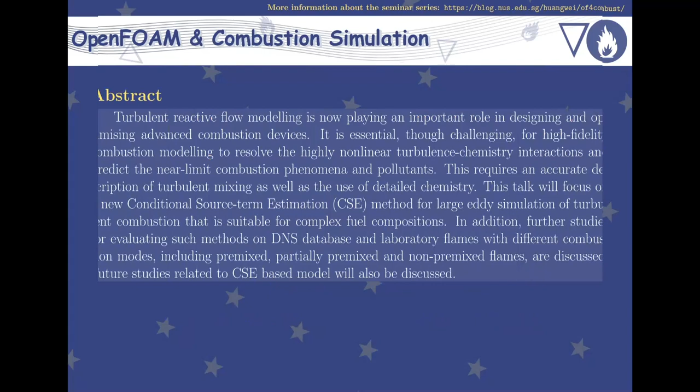So today is my great honor and pleasure to introduce you Dr. Liu Fang. Dr. Fang is an assistant professor at the Schulich School of Engineering, University of Calgary, and visiting academic of the Thermal Propulsion System Research Group, TPSRG, at the University of Oxford. Before his position in Calgary, he was an engineering science lecturer at Oriel and Somerville College and senior research at TPSRG. His research interests include turbulent combustion modeling and high fidelity simulation with detailed chemistry.

He received a Bachelor of Science degree from the University of British Columbia in Mechanical Engineering Thermal Fluids option in 2016, and a PhD in Engineering Science from the University of Oxford. Currently, he holds several projects as the principal investigator, PI, for the study of novel combustion chamber design and numerical study of abnormal combustion. So today he will talk about the conditional source term estimation, CSE model, hypothesis validation, and the model development. So let's see what Professor Fang can give to us.

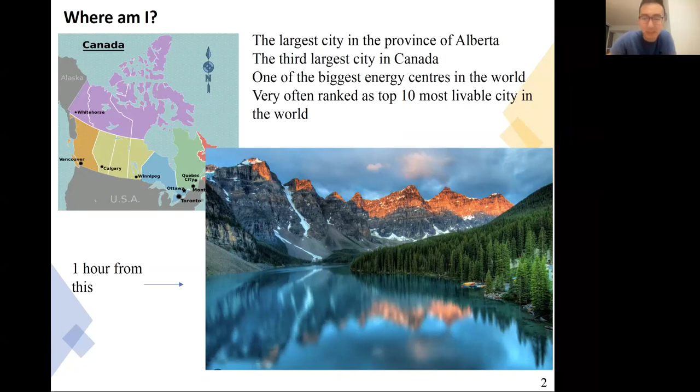Okay, so first of all, where are we? Most of you haven't heard about University of Calgary. We are a university in Canada. So we are located, we will say northwest of Canada, somewhere here, very close to Vancouver, and then probably pretty far away from Toronto, which are the two cities you would know for Canada. So we are the largest city in the province Alberta here, and then the third largest city in Canada. So we are one of the biggest energy centers in the world because there is oil and gas industry here. We are very often ranked as the top 10 most livable city in the world. And then if you haven't heard of this, you probably have seen this picture from your Windows screensaver. And this is us, which is 1 hour from here, which is Banff National Park.

Yeah. So a bit of University of Calgary. So we are a public research university in Canada. We are a U15 member, so one of Canada's top research universities based on the number of Canada research chairs. So we have a very high research budget or total revenue, which is around 1.2 billion Canadian dollars each year. And we have, as I said, very close ties to petroleum and geoscience industry with lots of opportunities in the energy sector because we are very, very close to the oil sand. So we also have a recent opening for an energy transition center, just purely for the University of Calgary. And then we also have an aerospace connection network. So this is about what I'm going to introduce for University of Calgary.

And then now it turns to what are the main research areas I'm currently covering. So one of them is turbulent reactive flow theory and modeling. So this will be a part of the topic here, which includes chemical source term modeling, turbulent chemistry interaction, and then models relevant to conditional moment closure approaches. So we also have a bit of collaborations with the University of Oxford in terms of chemical kinetic studies, because there are combustion bombs there. We do measurements for laminar flame speed. So therefore, we would do a little bit of chemical mechanism validation and then detailed chemistry software development just for the validation of laminar flames. We also have numerical studies of laminar burning velocities.

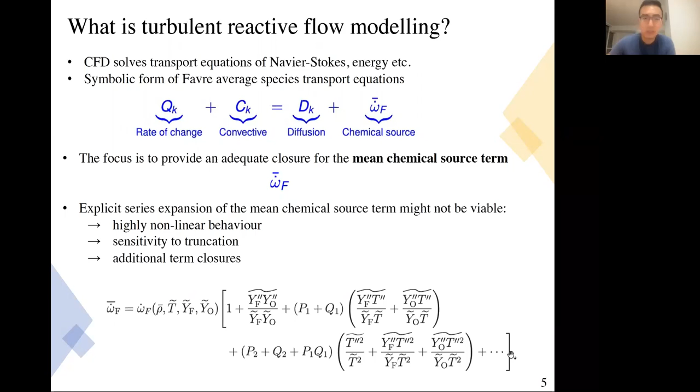So there are different treatments in the literature, but there are difficulties. Why is this very difficult then? It's because in a physical system, let's say I'm in an engine, or an aerospace engine or a gas turbine, what we would have is something burning, right? So if it's burning, we would have chemicals, and in chemicals, we would have chemistry. For a simple methane, we would have different scales for chemical reactions. And this can become exponentially more complicated when the fuel becomes, let's say, higher carbon fuels or a blend of fuels.

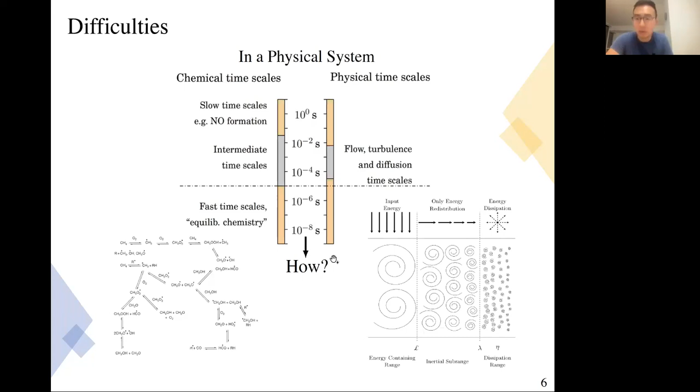And then now we also have the physical side of things, which includes physical timescales, which is the turbulence. So we would have energy containing range, inertial subrange, and dissipation range. But if you are in a system, these do interact with each other, right? And how do we incorporate this, which is what we call turbulence chemistry interaction? And this is one of the very essential parts of turbulent combustion modeling.

So what are the options? I'm not going to do an exhaustive list of the things that we can do for combustion modeling, but here are some quick examples. So a lot of the studies would use well-stirred models. We would assume that mixing is infinitely fast compared to chemical reaction timescales. The advantage of this style of study is that we can incorporate detailed chemistry. We will have a direct integration approach to evaluate the mean reaction rate. Omega can be a function of the mean species or temperature, etc.

But the thing is that here only the first order moment, or the mean of the scalars, is considered as a function, and it might be very tough to include TCI without any modification of the hypothesis. And then we have another school of combustion models, which is flamelet models.

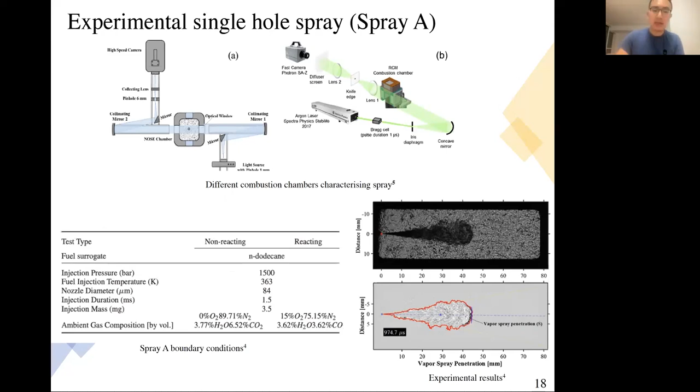So as a validation case, we will use the n-dodecane case because it's well validated and well studied. And then obviously this is Spray A, which includes the non-reacting and reacting n-dodecane, because at the time the project was mainly focusing on diesel engine studies. So what we have is reacting cases with increasing oxygen concentration as well as different gas compositions.

So what we have found is that, first of all, we implemented this in LES, but this can be directly transferred to RANS as well, because this approach does not have limitations in terms of implementation with RANS and LES. It was found that it's capable of capturing two stages of combustion, which is the characteristic of Spray A. And then we also compare with the schlieren image on the instantaneous temperature field from CSE FGM, which is on the right side, and the simulation on the lower part compared to experiments.

And then perhaps more encouragingly, what we found is that we can actually use this CSE FGM type of model to capture the scalar dissipation rate and its evolution with the flame extinction and then reignition. Although we believe that there might be more improvement for this model, because we use mixture fraction only to capture ignition, we can still find it, which is a very encouraging point for us to continue working on and improving this study. And then here are some results that have been published before for the CSE FGM type of approach.

So what's next then? What do we have next? So we have premixed combustion using CSE, which was covered by Professor Mahdi Salehi, and then non-premixed, which I've just shown. And now we have a more realistic representation of the flame, which would be partially premixed. This is undoubtedly more realistic compared to the previous perfect assumption for the flame configuration. So what can we do to make this happen for partially premixed flames?

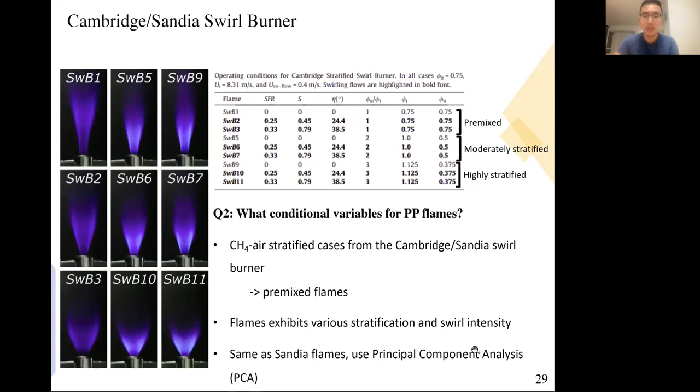So what we have here is for the swirl burner, we have premixed flames, but because of the stratification we have, it can be considered as partially premixed at some point, okay? So now we have flames that exhibit various stratification and swirl intensity. Same as the Sandia flames, but now we can use principal component analysis, because one of the things we want to study is what conditional variables to use. There are many techniques instead of choosing it directly, because we have the data, right?

So we have the data, which is a methane flame from the Cambridge Sandia swirl burner. And then we have 5 million point-based measurements of temperature and major species. Because we have major species and temperature, and it's 5 million points, you can literally treat this as single point measurements or a large eddy simulation of experiments.

So we can use principal component analysis to parameterize the given data using a reduced number of variables to see which variable is most significant in representing this flame. And therefore, we can study whether the extracted progress variable is a good option for doing this simplification.

So what we did is we chose different scaling methods based on suggestions from colleagues. And then we defined 4 different progress variables based on the PCA analysis, which I'm not including here. You can find details in the paper. We use progress variable 1, and a little bit of a surprise to us is that temperature is actually a good progress variable for representing this. Maybe not too much of a surprise because it's stratified, but one of them is temperature.

The next one is CO2, which we usually use anyway, and then CO2 and CO, and a combination of H2, H2O, and CO. This is data directly extracted from PCA, and we also correlated it to things we found in the literature as good representatives of the progress variable. So now we did progress variable combinations for this study. First of all, there's one combination with the progress variable as a single condition, because it's a premixed flame, so a lot of studies use progress variable as single conditioning.

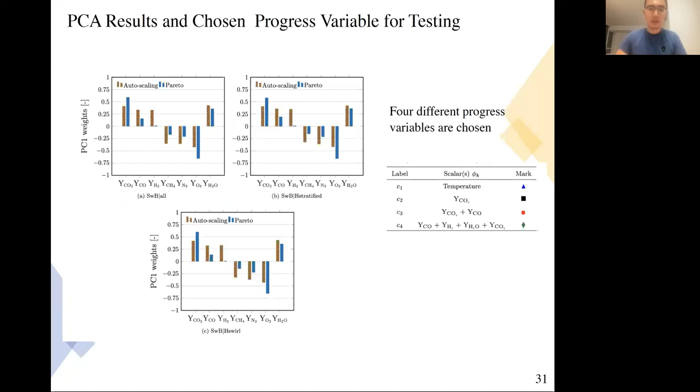And then this is what we have today, very short, brief studies on why we need CSE, why this is a good idea. We have more studies and more hypotheses to come, as I've shown here. We only cover question 1 and question 2, but a very big chunk of the study is what the best probability density function is. At the moment, usually what we have is a beta-beta function for progress variable and mixture fraction.

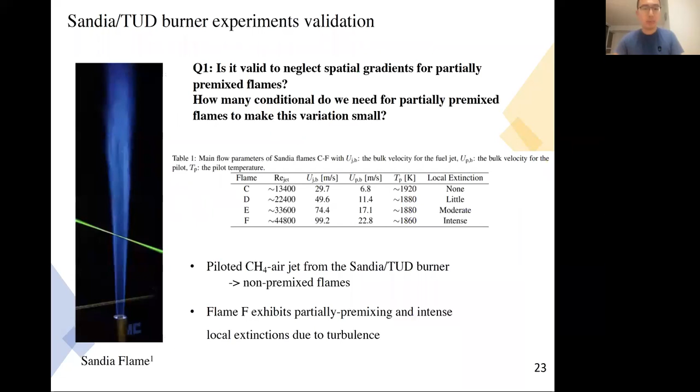But do we need more? Try something else, and see what an a priori study would show. And because we have the Cambridge swirl burner, can we directly reconstruct it from the partially premixed flame measurements and see what the best joint probability density function is? So we still have question 3 to be covered before we do a lot more implementation. But that's everything I had for today.

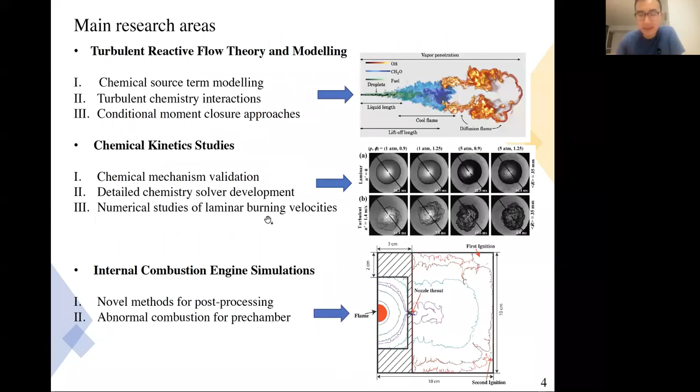Okay. Do you want me to go through this question first? Okay. I have very bad memory, apologies first. So first, what are the criteria for grouping? What we have is just physical dimension. The main reason for grouping this way is because we did the a priori studies later on, and we verified it's actually okay.

Yeah. Okay, I understand. My second question is, for CSE estimation, sometimes you will get unphysical values, for example, negative temperature and mass fraction larger than unity. So have you done any correction on the CSE estimated values? How did you treat this?

Yes, so one of the things you have to remember is that there is a major flaw in this method, because we use mathematics. It's actually not a conserved method. So that is a very big flaw, which we admit. But the advantage is way ahead of the flaw. So what is a good way of regularizing it? It really depends on your technique of regularization, because my approach is based on FGM.

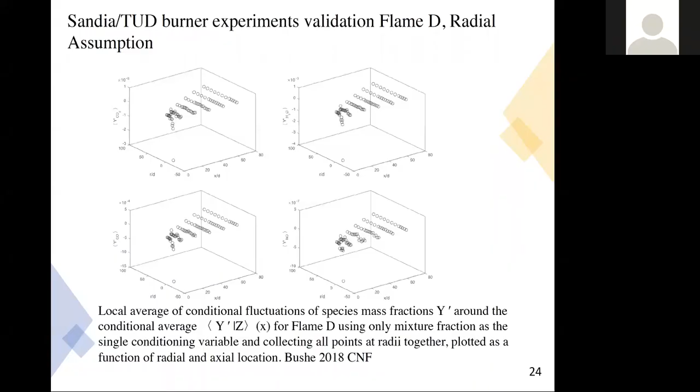Yes, of course. You mentioned that initially you introduced the CSE model with a single conditioning variable, right? And then you moved to double. So how about the computational cost when you move from a single variable to a second one? It would increase. First of all, on the transport equations themselves, you would have at least 2 more transport equations, for the progress variable and the double prime of the progress variable, which is the variance of the progress variable.

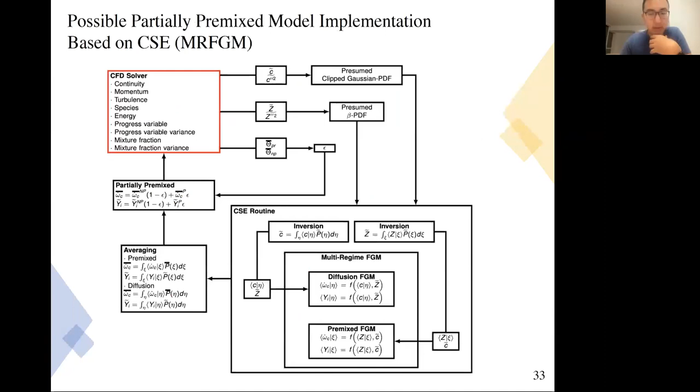And then you would also increase the size of your tabulation, because now you have a slightly bigger table which includes different parameters. And you would also have a joint probability density function, which is slightly more complicated as well. But I think it is worth it, because we are very confident this is one of the models that can produce very good results for partially premixed flames. So the compensation for this is good.

And also, remember, this is a model that can cover studies that are unresolved. So you don't have to go to a very fine grid to do this, because it's based on the physics thinking that the progress variable follows either a beta function or a clipped Gaussian, and mixture fraction follows a beta function PDF, which is proven by experiments as well as DNS. So therefore, the computational cost might even get lower.

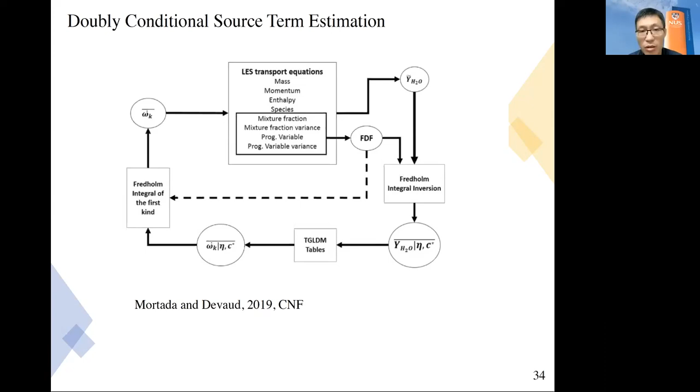Okay, yeah. Because I remember the people from the University of Cambridge also developed a double conditioning CMC. Actually, the computational cost probably will increase very quickly. So I'm not sure if you compared double conditioning in CSE and double conditioning in CMC, because here I guess all the comments are based on a single conditioning variable, right?

Yes. We haven't compared because we haven't got a case that they did similar to ours. So it wouldn't be fair to compare two methods with two different cases, if that makes sense. But if the opportunity comes, say CMC did Sandia D and CSE did Sandia D as well, and they did SwB and we did SwB, then I think that would be a perfect study.

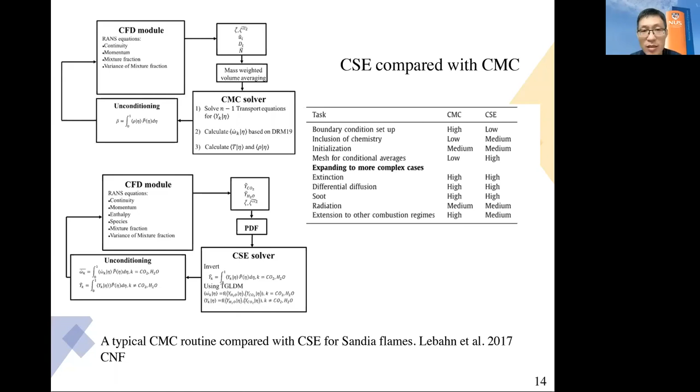Yes. Okay, thanks. Another question: I think you also consider spray flames, right? So for spray flames, I'm not sure if your flamelets, your conditional flame structure, consider the evaporation term effect or not.

So no, it's particular for this flame. We assume that because it's a diesel flame, the flame is actually not anchored anywhere that interacts. Well, we assume that it's not interacting with the spray, so it's actually gaseous fuel somewhere here already. Okay, so that means that your model is still from gaseous combustion, right? Gaseous phase combustion? Yes, mine is, but Cecile, who hopefully will talk very soon, is not. Okay. Yeah, so it can be incorporated into spray already.

Yeah. Oh, okay. Yes. Thank you very much. Thanks again for your introduction to the CSE model. No worries, my pleasure. Hi, Leo. Hi, Professor Yang. Oh, hi. May I ask you questions? Yeah, of course. Okay.

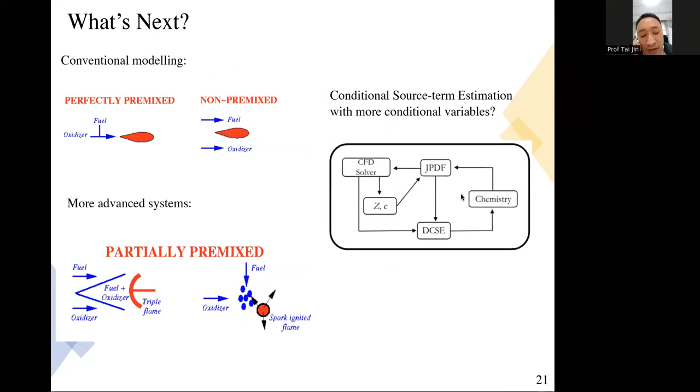So for the previous question about spray combustion, actually we have done some work on flamelet modeling where we consider the evaporation in flamelet modeling. So maybe we can discuss this later. My question is, you have incorporated CSE and the FGM model in your simulation. So how about the efficiency of the simulation?

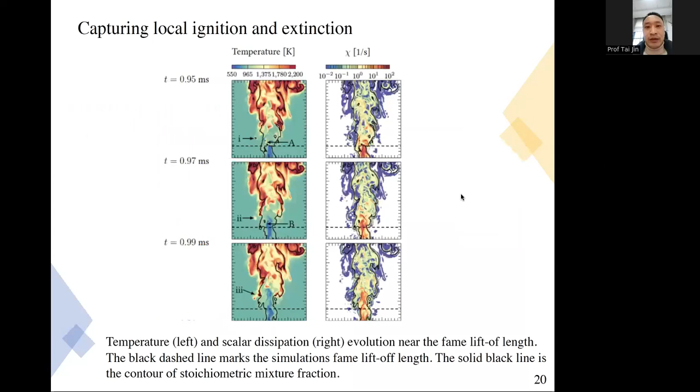Obviously, there's no argument that FGM will be faster than us. But from a theoretical point of view, just my personal view, for a simple implementation of FGM like this, which a lot of people would use, though there are advanced ones, I would believe that this model gives you better representative physics. So it would be more expensive in terms of computational cost. But as I said, you can even use this for RANS simulation. It will be fine as well.

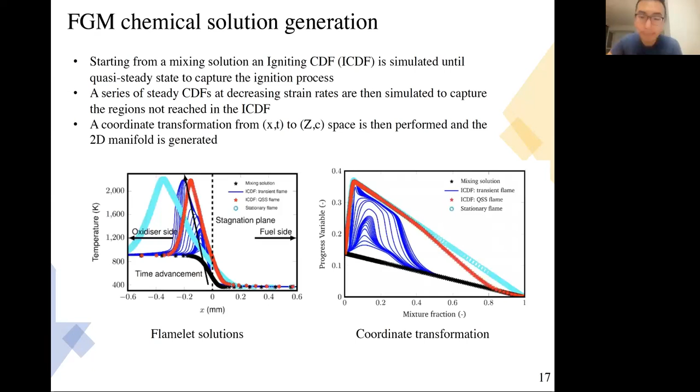My second question is, these days many people are working on incorporating ANN into flamelet or FGM. Do you have any comments on this approach? I welcome anyone that has a manifold that is very easy to use. Obviously, in manifold reduction or manifold representation, it makes sense using ANN because we would have a better representation of the lookup, because ANN does a very good job in interpolation. But in terms of the actual simulation, I'm not sure. I haven't tried, but I'm happy to learn.

Okay. Thank you. That's my questions. Yeah, no worries. Hi, Leo. So maybe I can ask some questions.

So basically, I think you try to say CSE is more broadly applicable than, let's say, the flamelet or flamelet-type approach. No, I don't want to say that. Just to clarify, there are advanced techniques to improve flamelet, say the multi-regime flamelet, as well as flamelet including various other dimensions, with C double prime, Z double prime, and even scalar dissipation rate. But if you're comparing a simple application of this type of two-dimensional FGM, I think CSE is a great addition to it. That's my argument.

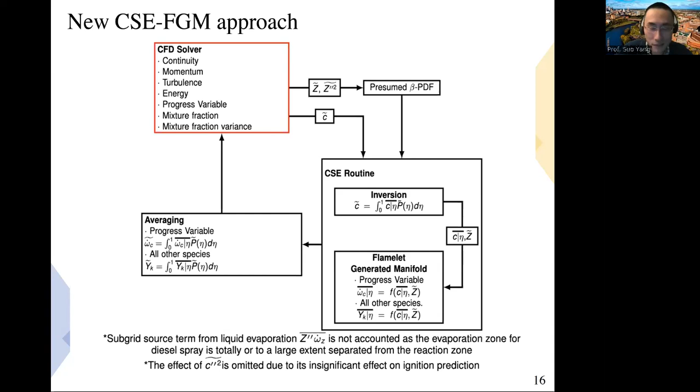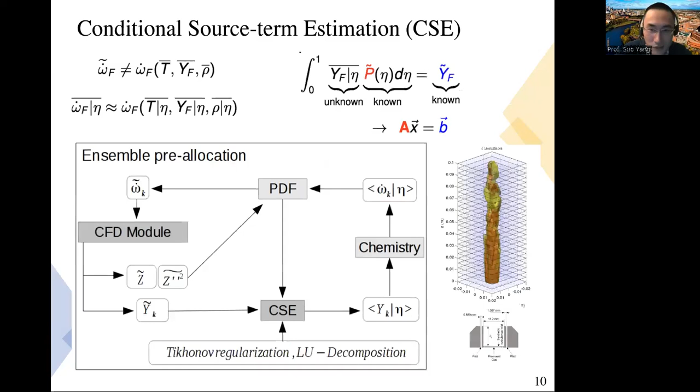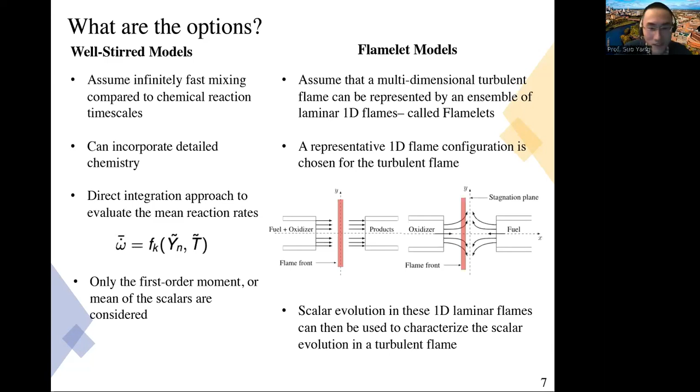I basically try to figure out, when you introduce CSE, in my view all the assumptions and hypotheses look the same as the different flamelet models. You can start with the basic flamelet and then FPV or other things. Is there any assumption or hypothesis actually different? Because that will indicate the difference in applicability, right? In the flamelet world, people didn't say it in the same language as how you describe CSE, but it's actually like that. It's also conditional, right?

Yeah, but the CSE assumption is really from CMC. I think even CMC is a similar idea to flamelet. It could be, but I think there's a very big argument in between as well, so I don't want to get involved in that. But at least from my understanding, in flamelet you would assume that the flame is located in the flamelet regime. But that's from the 1980s flamelet. But still, I don't want to get into this argument, to be honest.

Because I believe in your development, especially since you mentioned you want to add more variables, later even enthalpy, that's directly learned from what already happened on the flamelet side, because they are doing the same, adding more variables. Right, so we actually have a theory paper deriving equations from the conditional moment hypothesis to achieve the multi-regime flamelet equation as well. So you can directly derive this approach if you include three conditions.

But my take is that there are very few studies using three conditions from the multi-regime flamelet combustion model. RFPV has Z, C, and H, exactly like what you mentioned. I think the implementation for that is also extremely expensive, if I'm not mistaken.

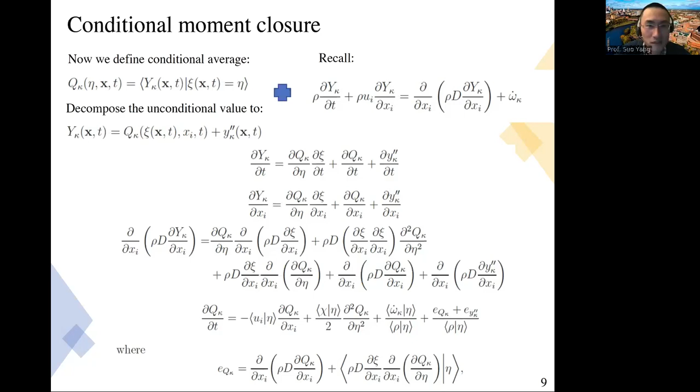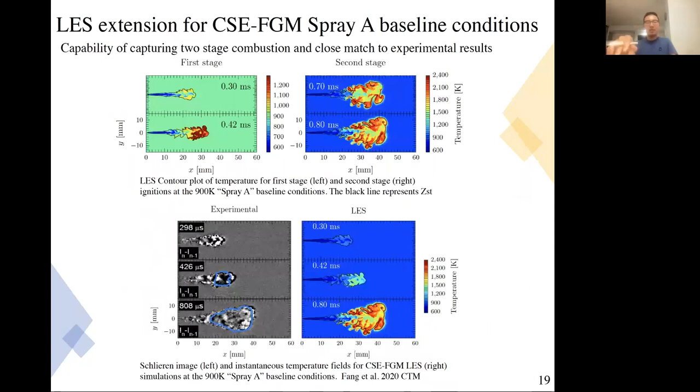Right. My last question is, I know you haven't reached there yet, but what's your opinion or idea about the joint PDF? What's the right direction to go? I actually talked to one of the panelists from Penn University. I think one of the methods he had was very good. Copula, I think copula is a very good opportunity for this, because Kendall did an a priori study on DNS just to test how much error is included in this entire model. It turns out that the joint probability density function is the most.

That's why we want to tackle this. Because we always use beta-beta or beta-clipped Gaussian, we think there are things people have done, and I remember Professor Chen Zhi has done something about it. So that's why we approached him as well. I think copula is a good way, and ANN might be, but in my view, I will try copula first. Okay, thanks.

Now there's a question in Q&A, looks like. This is Shirinva Saron, and he said, why implement the CSE model in OpenFOAM? Any additional libraries you need to create apart from the inbuilt library in OpenFOAM? The entire model is the additional library.

And this is quite a lot of PhDs' work. My part is adding a little bit on top of it. We have Professor Schulich, who did it 15 years ago. Kendall has done research on it for 20 years, and I've only done 6 or 7 years on it. So there is a huge library which we call CSE Foam. Every single step that we showed is actually a bit more complicated than shown here. Every single step is really a package library.

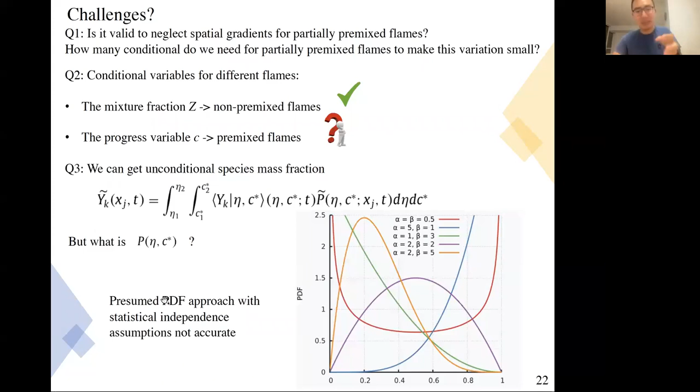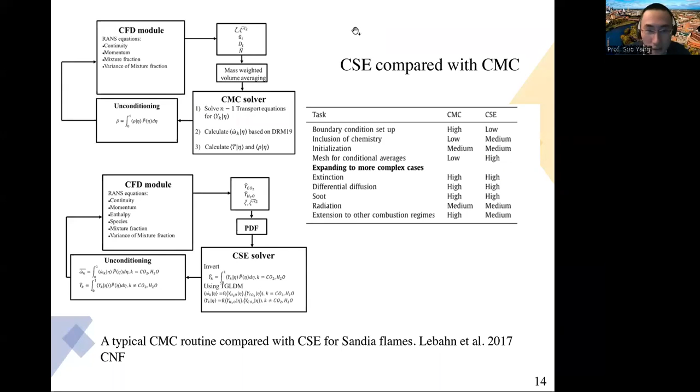By the way, I have a follow-up question to what Professor Wei Yao asked. You did that partition in space, right? And you have very good evidence to justify it. But for a practical engine combustion, where you don't have such a nice orientation of a jet flame, how would you do the partition in an arbitrarily complex geometry?

That's why we did bluff body validation as well. I didn't include it here because it's a bit more complicated to show. What we can do is triple conditioning with enthalpy. That's a hypothesis we said. If we have enthalpy included, mixing included, and reaction progress included, we don't need partition, and then it's insensitive to how you do that. Okay, that's good. There are engine studies of CMC before, I think. Yeah, sure. Thank you.